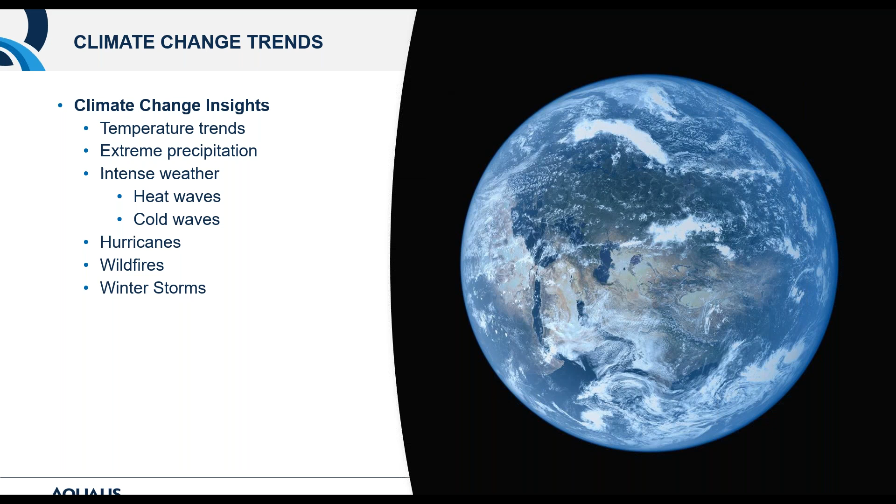As we discuss how climate change is affecting our environment and the influences each has over stormwater, we are also going to address how each solution is either a reactive measure or a proactive measure. Today's objective is not only to address aging stormwater infrastructure in relation to climate change, but what we can actively do to address these changes in the stormwater industry and create a plan moving forward.

Relative to today's presentation, the definitions of reactive and proactive are as follows. Reactive: activities that address any issue when it comes up, responding to the problem, and dealing with emergencies or failures on a case-by-case basis. Proactive: solutions aiding in the mitigation or elimination of problems before they occur, as well as anticipating an issue and intervening to prevent future recurrence.

According to the National Climate Assessment, the U.S. annual average temperature has increased by 1.3 degrees to 1.9 degrees since 1895. There were fluctuations throughout the 20th century, but warming trends remain consistent since the 1970s, with a rapid increase in temperature change. As mentioned previously, September of 2020 was the hottest month on record. The 9 months of January through September were 1.84 degrees Fahrenheit above the 20th century average, the National Centers for Environmental Information reported.

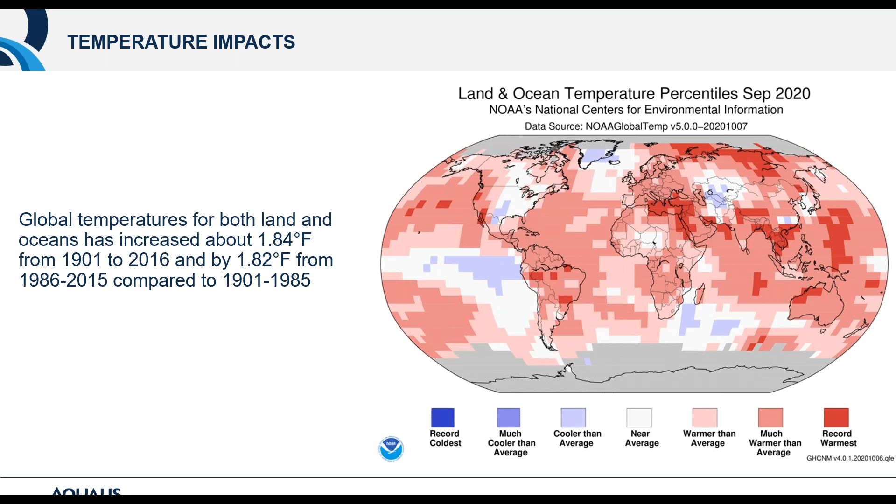As we've established, warming is occurring, but how does temperature impact stormwater runoff and local ecosystems? Thermal pollution is a threat to local ecologies, and stormwater runoff contributes greatly to this effect. Per definition, thermal pollution is the degradation of water quality due to unnatural changes in water temperature. Stormwater generally warms by mixing with receiving water bodies and increases the surface temperature of the water.

What contributes to thermal pollution in stormwater runoff? Surface systems exposed to direct sunlight increase already elevated runoff, and impervious pavement increases the temperature of runoff. According to the EPA, asphalt can run 20 degrees Celsius warmer than sod surfaces and runoff roughly 10 degrees warmer than runoff temperatures. The University of Minnesota conducted a study on thermal pollution from paved surfaces.

This study found that out of 261 rainfall events in the summer, the average water temperature did change from interacting with paved surfaces. They found that when interacting with the paved surfaces, the overall temperature increase was a minimum of 37.4 degrees Fahrenheit, with a maximum of 60.62 degrees Fahrenheit. The study also concluded a relationship between the increase of rainfall temperature to runoff temperature and ground surface temperature. This warmed runoff then makes its way into the natural environment, heating the water bodies it reaches and ultimately harming the environment and aquatic life.

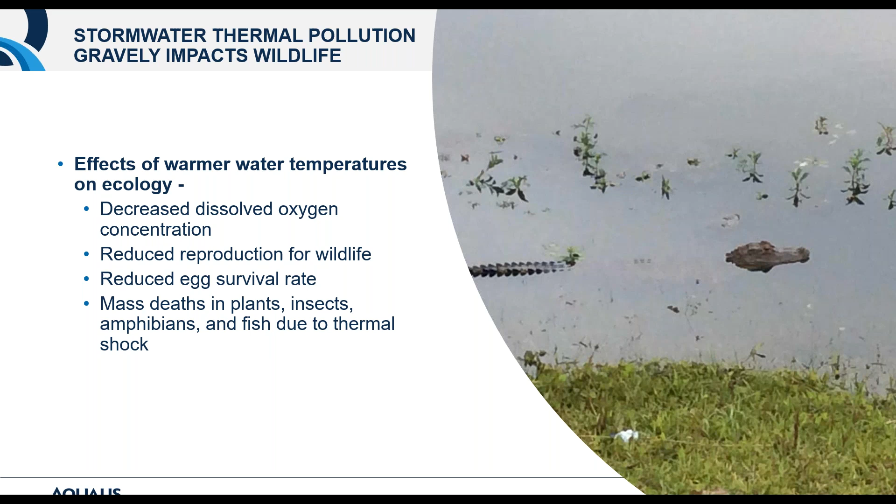How do we address thermal pollution in stormwater? We can take a completely reactive approach by introducing new wildlife to ponds after thermal pollution has created ecology issues in the pond, but this will only last until another warm rain event. Additionally, we can monitor the temperatures in our stormwater ponds, but what action can we take when we find out the temperature has increased? It's often too late at that point.

A reactive approach could be to increase capacity to dilute the increased temperature with the runoff with more of a temperature-controlled pooling of water.

Proactive approaches include utilizing technology and data from it to make predictions on thermal changes to make the appropriate retrofit or rehab changes. When it comes to retrofits, underground piping is found to have cooling effects on stormwater runoff, reducing risks to wildlife and local watershed, which is an option for ponds that are most at risk with runoff coming from impervious pavement. Designing new systems with increased pervious pavement would be beneficial, as found in a study published by MDPI's Hydrology, an international peer-reviewed open access journal in 2019.

A thermal spike was identified in all impervious pavement stormwater runoff datasets during their study of thermal characteristics of stormwater runoff. A temperature spike occurred within the first 5 minutes of exposure to rainfall. One surprising and beneficial finding of this study is the apparent higher capacity of pervious pavements to capture and exchange heat compared with impervious pavements. Another proactive approach includes increasing low-impact designs where appropriate to further treat runoff, collect pollutants, and reduce thermal pollution.

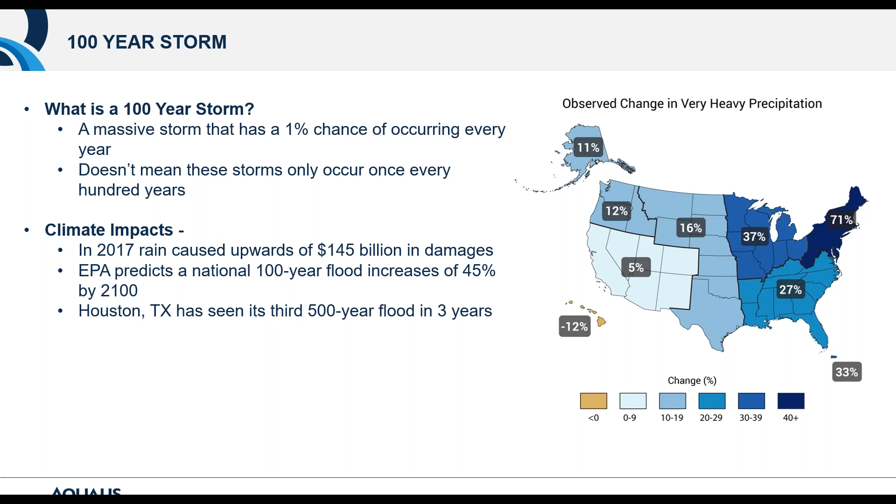In addition to causing catastrophic damage to local properties, the 100-year storm places intense stress on aging stormwater systems. Already aging infrastructure is reaching its capacity sooner than calculated, as currently designed stormwater control measures, or SCMs, cannot withstand 2.5 times their capacity, putting these systems in nearby areas at a greater risk for flooding. We see stormwater failures leading to emergency calls and repairs due to flooding after these recent storms.

Unpredictable rainfall, or not accounting for these changes in predictions for increased rainfall, causes systems to fail sooner. When the rainfall is extremely high, there is less time for systems to filter pollutants in the runoff that eventually end up in our local watersheds, and high runoff disrupts any settling process of sediment in the ponds.

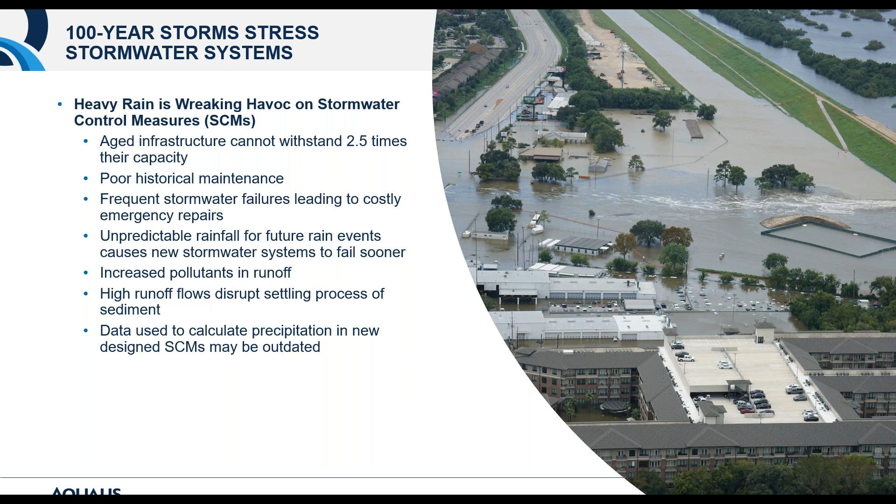Data for calculating precipitation is usually outdated and not accounting for the recent trends in high precipitation that we just discussed. When it comes to climate change, stormwater runoff is most impactful to systems. This is what SCMs were designed to do, to treat and manage runoff from rain events. However, systems are dated and aging. To continue to have systems function as designed, we must continue to innovate and adapt with new methods to treat

these extreme rain events. Reactive approaches to treatment in extreme rain events include expediting drawdown after a rain event. This is a typical practice in response to extreme rain. Monitoring runoff levels after a storm. This should always be done after a 1-inch rain event to ensure systems are still working as designed. Any repairs due to flooding. This is when a system will fail if not properly maintained. Most emergency repairs come in response to pooling water or overflows in parking lots, and all can easily be prevented with preventative maintenance.

Proactive approaches heavily rely on preventative maintenance, including dam slope inspections, a common failure from rain events, and an example we will discuss in the next case study. I can't say this enough. Proper preventative maintenance is key to proactive solutions to extreme rain events. By having preventative maintenance performed, common failures can be identified and solutions provided before a major repair is required.

Completing retrofit and rehabilitation to meet new precipitation calculations from new projected data. This is also where having data and history of a system through preventative maintenance can assist in making the right decisions for rehab and retrofits. Monitoring systems by utilizing technology, identifying if there are issues before a major storm so they can be handled before any flooding or major damage can occur.

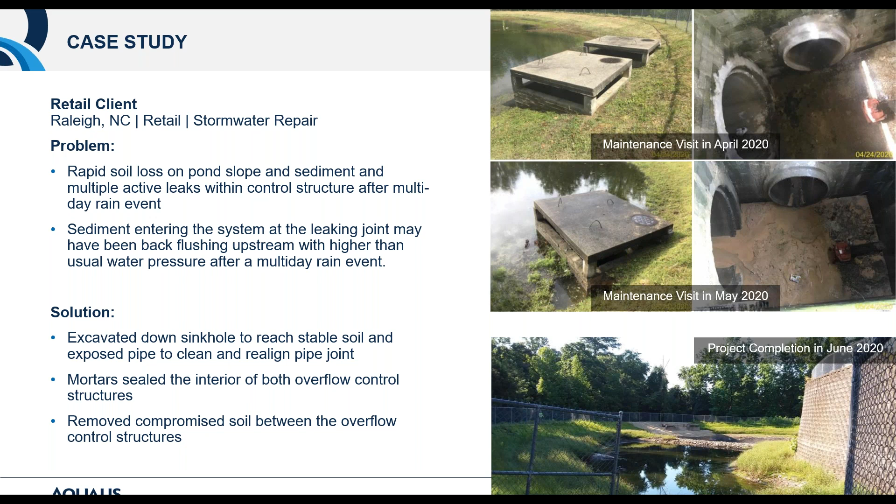The initial repair, using common practices, did not hold up to a major rain event, which we are seeing more frequently. To adequately rebuild the dam and address the issue, we engaged a geotech engineer who suggested a concrete cradle be installed along the length of the discharge pipe. Since this repair in August, the slope has held up very well with the cradle installation. We continue to monitor this asset during any significant rainstorms or light rain. This is a great example of how these extreme rain events are putting strain on systems and impact common retrofit practices today.

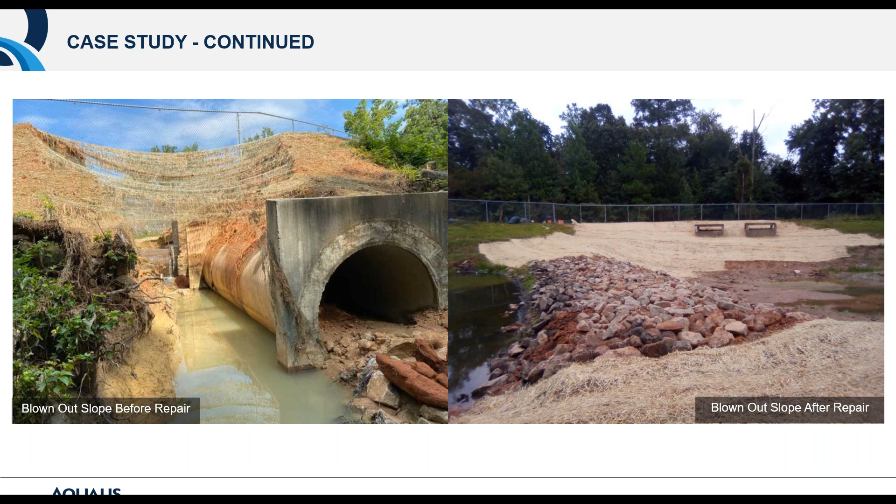It is not new news that 2020 has been one of the most active hurricane seasons in history. However, intensity of storms and frequency of hurricanes have increased since 1970. While projections indicate that there won't be more hurricanes like we saw this hurricane season, which has so far produced 29 named storms, we do anticipate seeing an increase in major hurricanes of categories 4 and 5.

Higher sea levels and warmer surface temperature, as we discussed previously, have all been known indicators to impact hurricane intensity. Additionally, we have seen a 6 to 8 inch higher sea level since 1900, which increases the height of storm surge for coastal regions, as we've seen in the last 20 years, like from hurricanes Katrina and Michael. Storm surge is more deadly and costly than rain from a hurricane. Coastal regions should be putting more emphasis on emerging stormwater solutions, as they are at greater risk for major failures and catastrophes to systems due to storm surge.

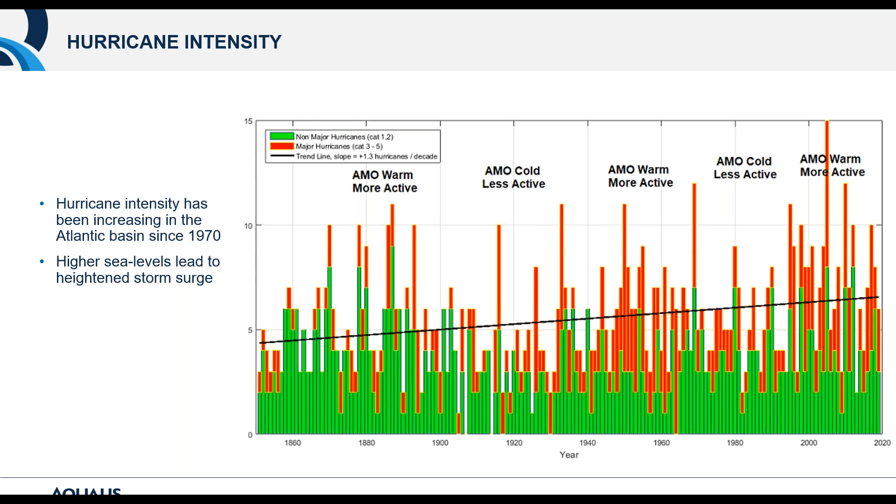When we talk about stormwater, our first thought is often rain and water runoff. However, it's not just the rain and runoff that impacts stormwater infrastructure. Storm surge and high winds are both major concerns when a tropical storm or hurricane makes landfall, and as we discussed in the last slide, storm surge impacts are increasing due to climate change. With storm surge comes quicker flooding. Unfortunately, there is no way of monitoring a stormwater system during a storm outside of technology, which we will discuss later in this presentation.

Powerful winds can lead to power outages that halt operations at portions of your stormwater system that require electricity to function, as well as blow debris into or onto stormwater infrastructure, causing clogs or blockages to the system. Costly emergency repairs, including dam failures, result in major property damage, sediment loading, and erosion throughout systems or damage to recently completed capital projects. Additionally, many below-ground assets are at risk structurally due to age, as the average wastewater and stormwater infrastructure in the U.S. is more than 100 years old.

Public water supply is at high risk for contamination, as hurricanes can cause cracked water lines from trees that have been uprooted. In 2012, following Hurricane Sandy, the Northeast saw significant damage to more than 100 facilities that supply drinking water to residents and sewage treatment plants. Hurricane Sandy resulted in $2.6 billion to repair, rehab, and increase the sustainability of these systems.

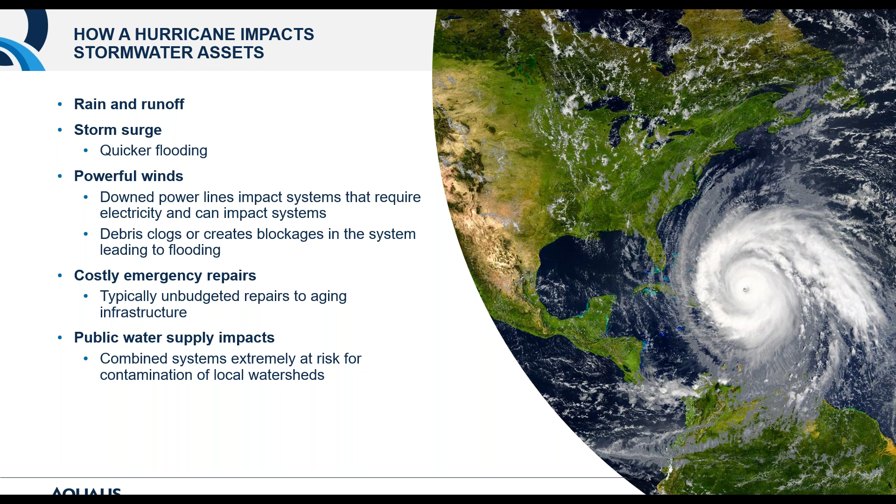Similar to what we've discussed in the extreme rain events, but some different here, proactive approaches include drawing the pond down prior to the storm. Routine inspections are still critical in removing debris around your assets to prevent any blockage, and testing of systems to ensure they are functioning properly. Continue to evaluate if flooding is occurring on a frequent basis that retrofit or rehabilitation is needed for additional capacity, especially in areas most prone to hurricane activity.

Utilizing technology to monitor before a storm to assess overall health of the system. This data is essential for determining the priority of retrofit or rehab for systems. Assessing and testing backup energy that extends more than one day. It is essential to prepare systems and have a plan before hurricane season. This means planning as early as January, setting up preventative maintenance plans, and strategically planning repairs before hurricane season, which I will walk through in a checklist later in this presentation so that you are fully prepared for an extreme rain event.

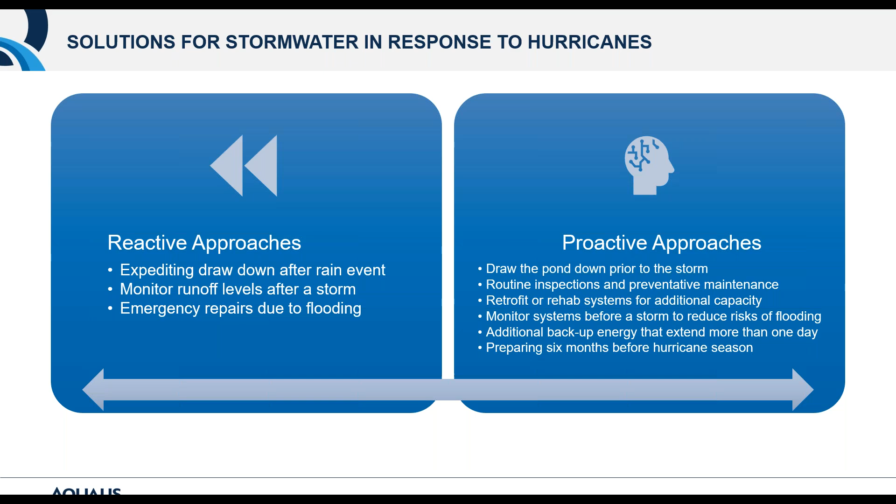As of August this year, South Carolina had an increased chance of hurricane landfall from 18% on an average year to 27%. It is safe to say that South Carolina must respond to rising sea levels, threats of hurricane, and extreme rain events. As part of that initiative, Charleston, South Carolina is making proactive improvements across the city to increase sustainability and mitigate future flooding. As part of their 5-year capital improvement plan, they are addressing stormwater drainage projects as a short and long-term capital need for the city.

One great example is the Forest Acres project that was completed for Phase 1 in 2018, even being awarded the South Carolina American Public Works Project of the Year. According to the City of Charleston, South Carolina, the existing pump station consisted of a wet well with a single vertical pump, originally from 1968, discharging through a single 48-inch concrete pipe. The stormwater pump station is powered by electricity from overhead power lines and has no emergency backup generator.

The station pumped stormwater approximately 1 mile east through a gravity flow pipeline located in the West Ashley Bikeway to where it discharged into the Ashley River. This proved to cause significant flooding during extreme rain events from tropical storms and hurricanes, as a lack of backup generator would cause flooding to occur quickly and typically knee-deep in height.

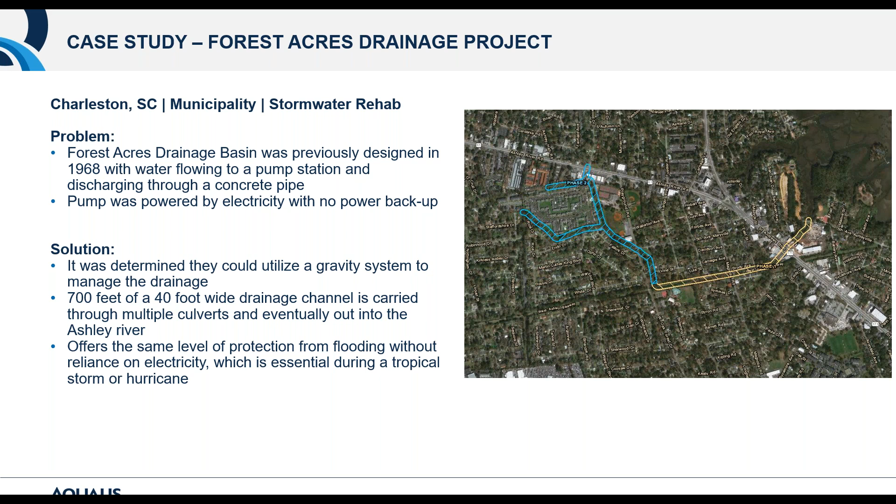As extreme weather is on the rise, including higher temperatures and climates that are drier in nature, wildfire is on the increase as of the last 2 decades, with double the number of acres burned since 2000 in comparison to the 1990s. There are 3 factors in which fire needs to thrive. First, the right weather and climate conditions. Warmer weather and drier seasons where rainy season does not usually begin until October. Like a hurricane season, fire season runs from June to September, typically when drought conditions can be expected.

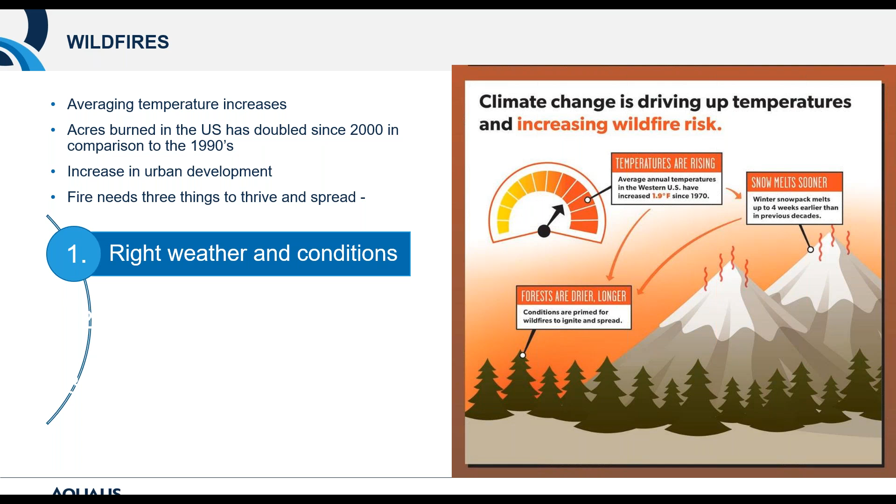Burnable fuel. With warmer atmosphere, water is being absorbed at a rapid rate, including plants, soil, lakes, and rivers all being absorbed, leading to an increase in flammable materials. Spark. Only 10 to 15% of wildfires occur naturally. Human activity, like unattended campfires, cigarettes, or gender reveal parties, as we saw this year, all can be the spark in the right conditions to burn acres of land, destroying property, homes, and local environments.

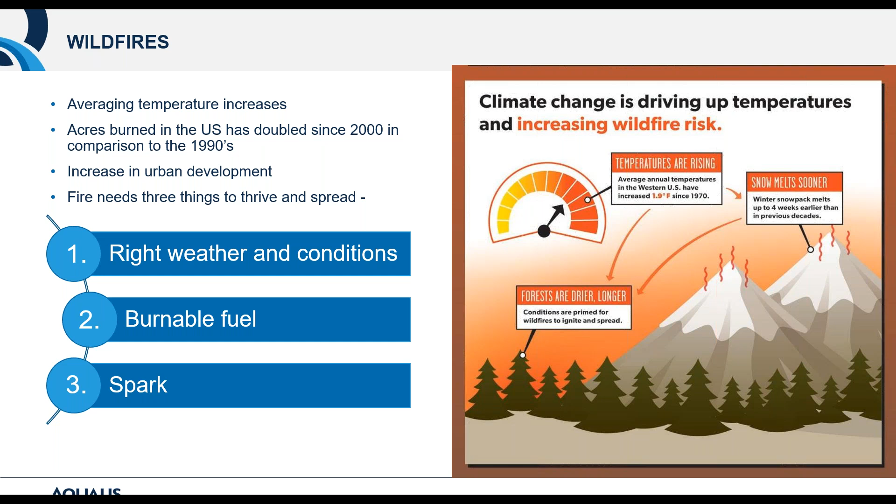Increase in urban development has also reduced the natural cooling effects from trees. In fact, just trees shading a neighborhood can make it 6 to 10 degrees Fahrenheit cooler than neighborhoods without tree vegetation. Also a great solution for thermal pollution. This is an excellent example from FEMA around the risk of flooding after a fire, especially for those at the bottom of a slope. Floods pick up the charred debris from the wildfire and deposit it directly into stormwater assets, clogging systems and requiring costly repairs.

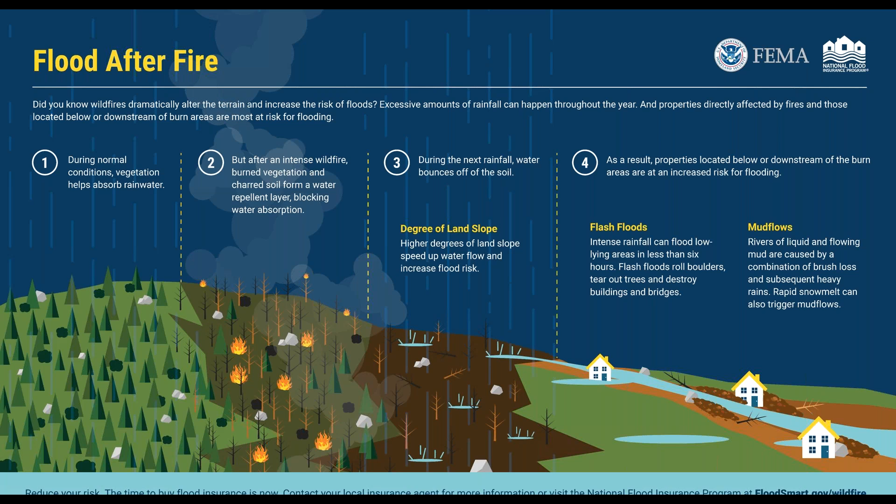In stormwater, it seems like water is what matters. However, there are so many contributing factors to impacts on water quality, sediment buildup, and flooding that can result from wildfires. Hydrophobic conditions is the inability to absorb water due to intense heat. Essentially, the grounds after the fire will repel water, causing increased chances of flooding. Ash deposition and accumulation can clog systems. However, if systems are maintained per O&M agreements, they should effectively trap the ash in the muddy bottoms of the settling ponds.

Heavy metal contaminants can make their way into runoff after a first rain after a fire. Systems may not pass an inspection due to the ash accumulation and water quality. It is essential that within a window of 7 to 10 days after a fire, a water quality test is completed. Filters that remove pollutants will need to be replaced sooner after a fire, and it's important to monitor that these filters continue to function as designed and are replaced as needed, or additional capacity added if in a fire-prone area.

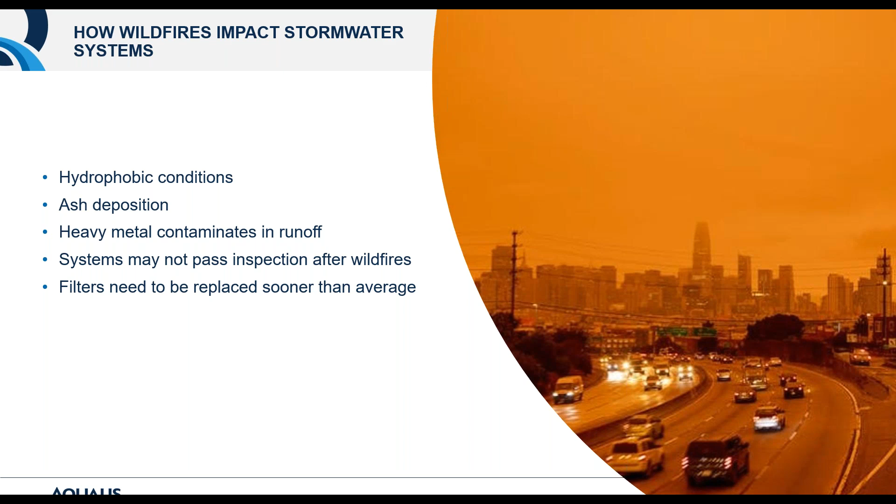Reactive solutions for stormwater in response to wildfires include pH balance testing after wildfires and proper treatment if at high levels. Monitoring runoff after a storm due to the hydrophobic conditions; a rain event that may not be extreme in another region could pose to be an extreme amount when precipitation can't be absorbed by the soil. Removal of any ash accumulation, if excessive and not settling in the pond. Important that this is monitored, and if systems are not being maintained properly before an event, ash accumulation could pose a major threat to the system. Replace any filters after a wildfire to ensure these are continuing to function as designed to filter pollutants.

Proactive approaches in relation to wildfires include routine inspections and preventative maintenance, retrofit and rehab for additional capacity, monitoring systems before a rainstorm and shortly after a fire to reduce risks of flooding, and prioritizing wetlands and dams that have been shown to be a great treatment for preventing wildfires.

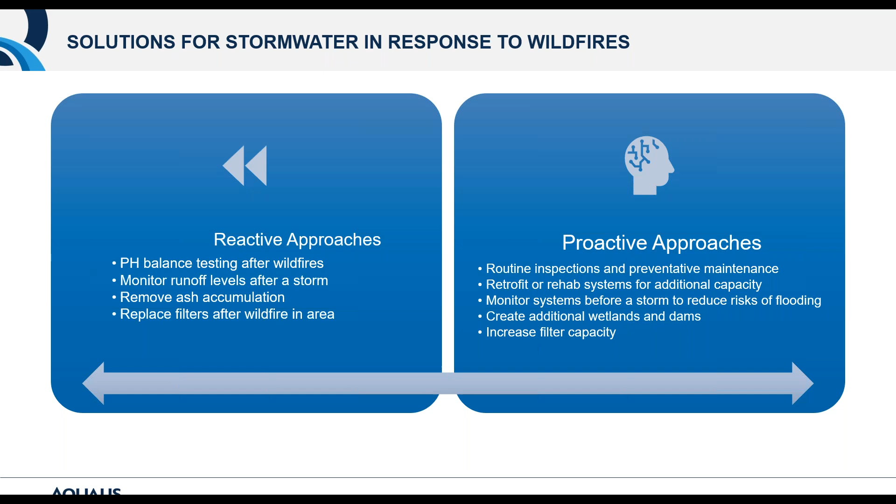After recent wildfires in Albany, Oregon, our crews tended to our sites that have contracted maintenance programs. As recommended following a fire in the area, monitoring and visiting sites within 7 to 10 days to assess potential wildfire effects to stormwater assets is imperative. As pictured here, you can see ash accumulation on the pond surface. pH testing to monitor any levels that would require treatment is necessary.

The solutions to these issues are as follows. How to treat pH: you can aerate and add a fountain to stimulate the release of carbon dioxide, which will break up and form carbonic acid, which will help lower the pH. As mentioned before, the nature of the system often mitigates the issues that ash can create. These settling ponds can effectively trap the ash in the muddy bottom.

The desirable emergent plants, like common rush grass, will absorb pollutants like heavy metals. For major accumulation events, we can bring in temporary treatment units that constantly cycle the water out and back in, like a massive dialysis system.

We can neutralize the pH and absorb pollutants and metals from the water by using oyster shells at strategic locations. Ash treatment is one of the many stormwater applications using oyster shells shoveled directly into stormwater catch basins to absorb heavy metals, with the goal of increasing water hardness and decreasing metals.

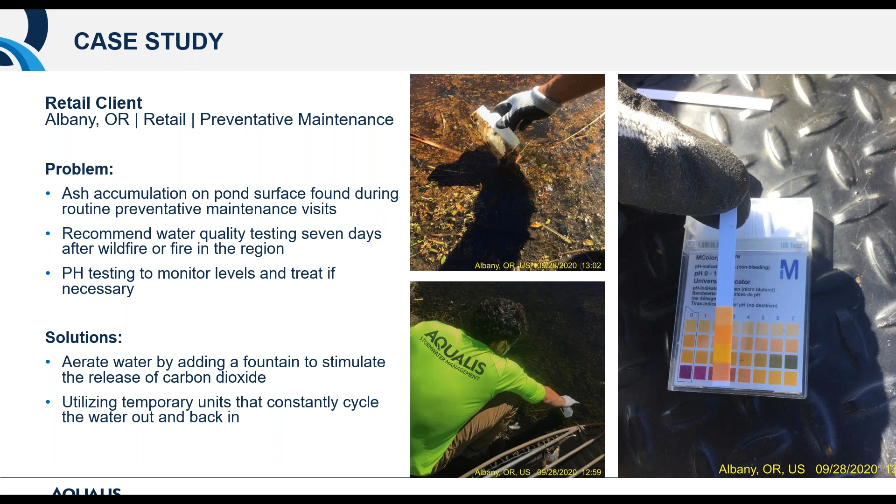Climate trends indicate an increase in intensity of snowstorms when they do occur. However, there has been a decrease in intensity in snowstorms in the last 20 years due to rising temperatures. Since 1972, snow coverage season has decreased by 2 weeks, causing earlier than normal snowmelt, putting further stress on stormwater assets.

2020 winter predictions, according to the National Weather Service, predict warmer and drier conditions in the south and wetter and cooler in the north, specifically in the Pacific Northwest, Northern Plains, Great Lakes, and into the Ohio Valley.

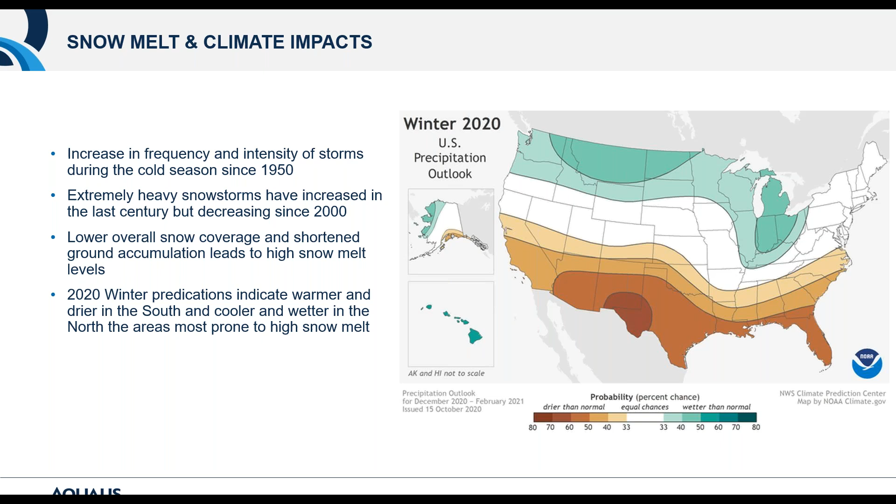Snowmelt presents some unique challenges to stormwater systems. Since freezing temperatures cause the surface of the ground to be frozen, snowmelt can't infiltrate the ground. Even minor amounts of snow can increase the chance of flooding in the right conditions. When this snow does eventually melt, it picks up debris just as an extreme rainstorm would, all with the potential to cause blockage in the systems and inevitably lead to flooding.

Also, as the snowmelt occurs, it is picking up pollutants on the road from de-icing salts and other chemicals. Snow carries more pollutants, especially airborne pollutants, as the snow is exposed for longer before it melts. The most at risk for heavy pollution and impacts is the last snowmelt of the season. Mixed with a small rain event, this can lead to high concentration of pollutants and a high runoff volume, putting extreme stress on your stormwater system.

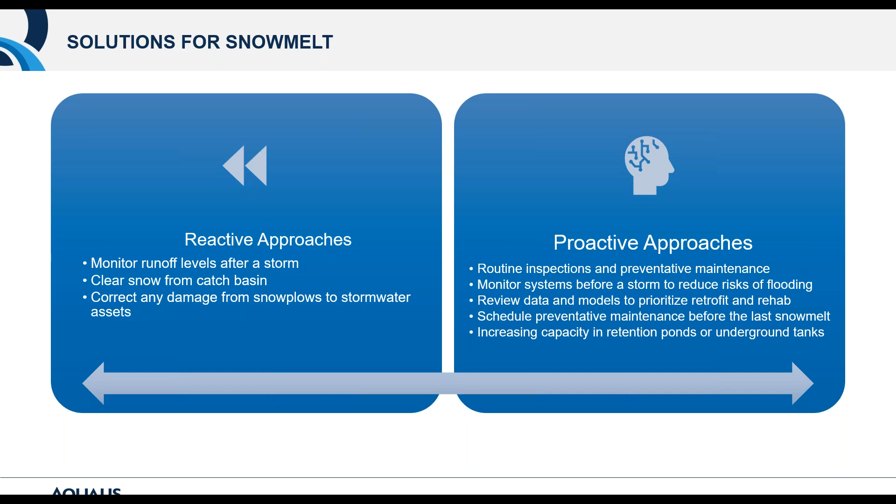We also see fluid leaks from heavy equipment that is typically stored year-round in the parking lots that eventually reaches catch basins, impacting water quality. There are a few solutions to these issues we see at the sites and how we treat them.

Street sweeping is commonly done almost daily at sites with this amount of buildup still occurring daily. Maintenance and monitoring is typically done on site to prevent any blockages that can cause catch basins to not function as designed. Additionally, utilizing industrial vacuum trucks to remove the excess sediment is something that we use as a treatment option to reduce and remove buildup.

As a maintenance provider and protector of local watersheds, we look for any potential contaminants in stormwater systems when on site. We see this far too often with heavy equipment, including snowplows that are stored year-round in parking lots or local properties. We monitor these situations should treatment be necessary, but there are proactive items that can be done, like adding absorbents underneath these vehicles to capture the fluids before they reach the pavement and ultimately reach the catch basin.

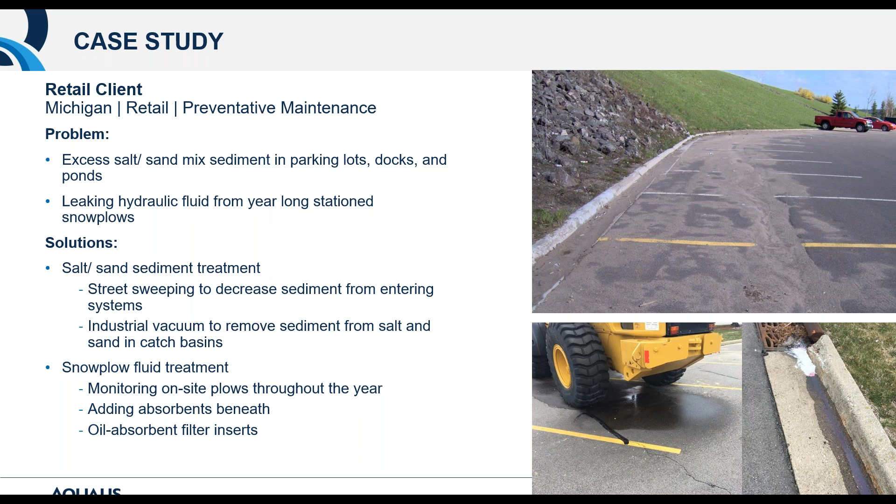Preventative maintenance and checklists for preparing systems for extreme weather. Before we talk about the importance of preventative maintenance, Ryan is going to interrupt to poll attendees to see how stormwater is managed in your region.

Awesome. Well, thank you there, Erin. Folks, as Erin just said, we're going to pause for a quick moment to poll everyone real fast. This is our one and only poll question of today's presentation. So the question here is, how do you see stormwater being managed in your region? Choices are A, stormwater management provider, B, landscaper provider, C, handled internally, or D, do not have a preventative maintenance plan.

I'm going to go ahead and launch what we call the quick poll widget in just a quick second, and you'll be able to input directly into that. I'm having just a little bit of trouble getting this thing started, so if you folks will just bear with me. My apologies, Erin. It opened it and then it slammed it shut right away, so I'm having to recreate it real fast. In the meantime, I'll reread the options: A, stormwater management provider, B, landscaper provider, C, handled internally, or D, do not have a preventative maintenance plan. We're just a moment away, I do promise. Folks, if you'll hold off on putting them in the chat box, we're actually going to launch a widget for these.

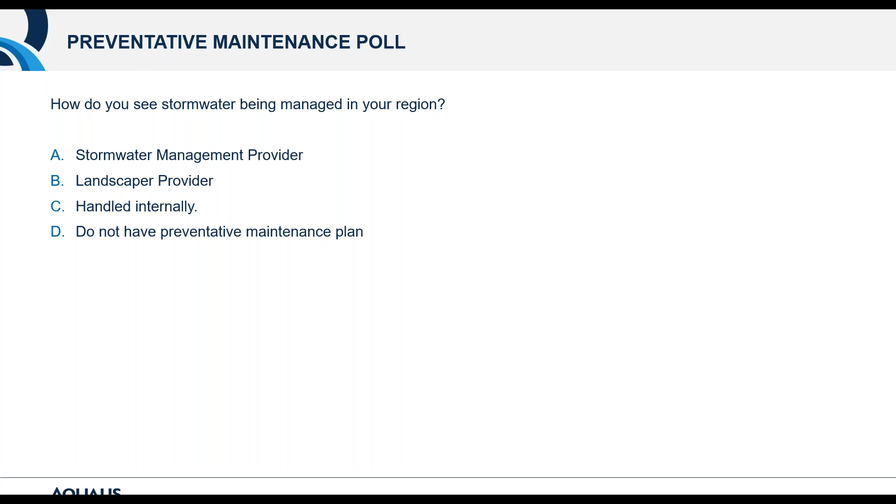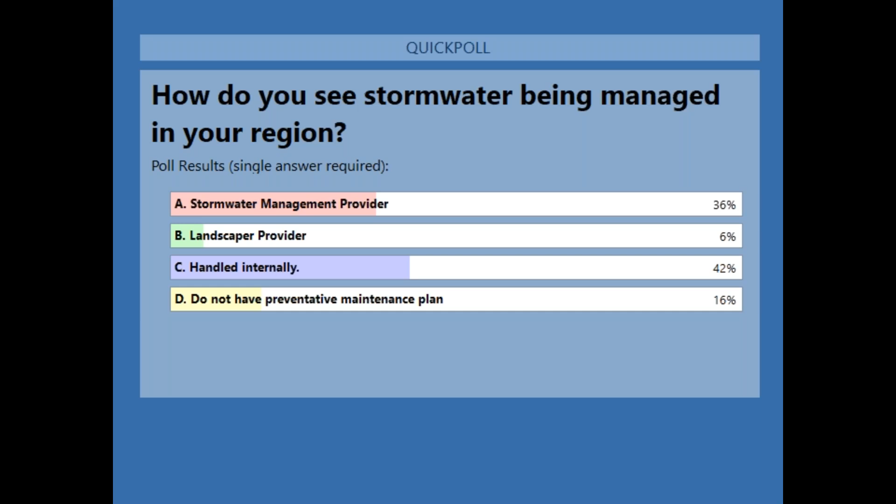Awesome, thank you, Erin. All right, folks, we've been open for about a minute and we have 80% voted, so let's consider that good enough. Let's close this out and share those responses. C, handled internally, ends up winning at 42%, followed by A, stormwater management provider at 36%. 16% say D, do not have a preventative maintenance plan, and just 6% said B, landscaper provider. Thank you all for your participation.

Thank you, Ryan. And I do apologize. We just had a major storm move in here, so it might get a little bit noisy in the background.

Jumping into preventative maintenance, the goals of stormwater management include protecting our environment, reducing flooding to protect people and property, reducing demand on public stormwater drainage systems, supporting healthy streams and rivers, and creating healthier, more sustainable communities. We tend to find many landscapers performing maintenance on stormwater systems, but just addressing vegetation is not enough to keep SCMs in compliance and performing at design capacity to properly manage increased runoff due to climate change.

We know that for every $1 spent on stormwater maintenance, we expect $4 in cost savings and loss avoidance, if not more, financially and environmentally. Preventative maintenance is the solution for keeping systems functioning in order to meet the new demands for climate change. Regular maintenance of stormwater infrastructure reduces the risk of system failures and the frequency of costly restorative repairs, and as I presented earlier, is always the proactive solution to treatment of all extreme weather.

Our crews perform with 3 to 4 individuals stationed in geographies across the United States. Our team members, including our administrative team, are all certified for stormwater inspections and maintenance. We establish a frequency of visits throughout the year based on the specifics to the locations and the potential needs or threats to the systems, as well as the O&M agreements established with municipalities.

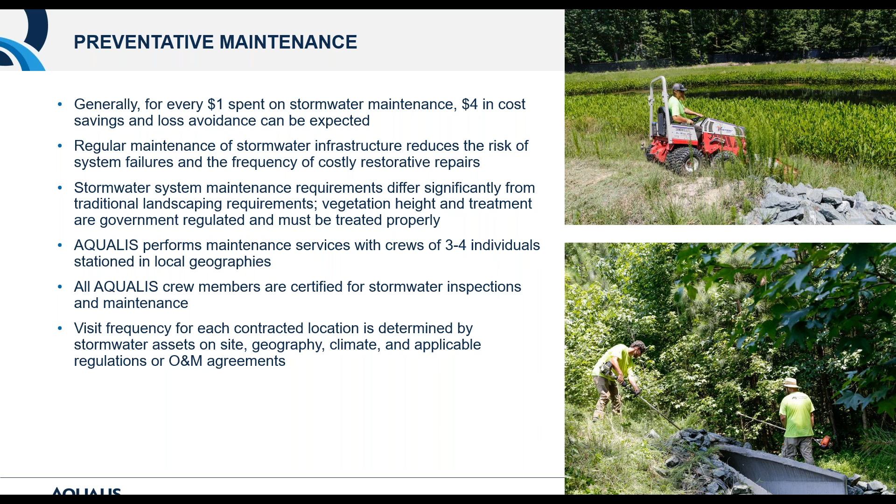For more than 20 years, this has provided us a firsthand view of how these climate trends are impacting stormwater. Whether you are in Florida experiencing threats of extreme rain in the summer, or in Washington experiencing snowmelt in the spring, we address each key geography based on their specific needs.

The solution that has been consistent throughout this webinar is the importance of preventative maintenance. What we know is that these systems were designed to hold large capacities and be prepared for a 100-year storm or flooding. This should be the time for your stormwater asset to showcase what it is meant to do. That being said, it is only as good as it is maintained.

The future of stormwater. As we've established, we need data to drive our next steps in stormwater. With information within reach always, it's time to adjust how we approach aging infrastructure and capture a full picture of how stormwater is managed in systems with the use of technology. We can use data from sensor technology to understand how best to rehab or retrofit to meet new capacity needs, and we can enhance further stormwater design to meet new capacity requirements.

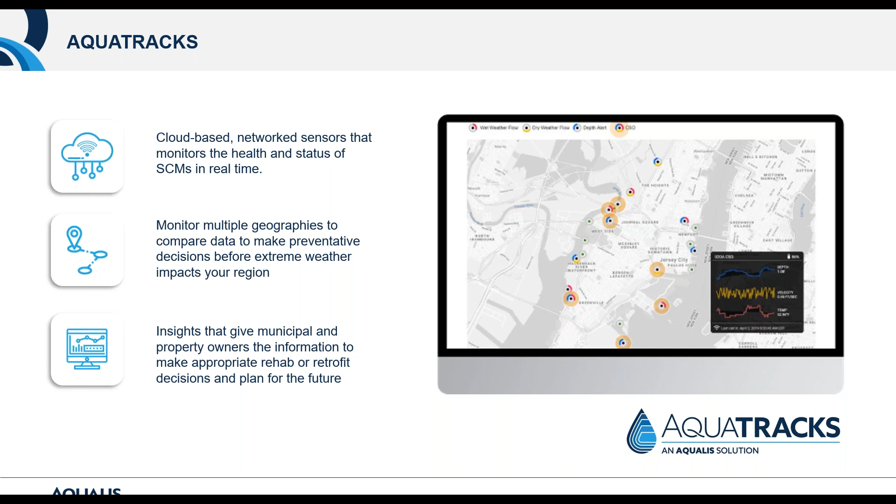The system allows for monitoring across multiple geographies to compare data to make preventative decisions before extreme weather impacts the region. The system includes weather forecasts and alerts to prevent any major catastrophe to the system before it occurs. Insights provided by the sensor system give municipal and property owners the information to make appropriate rehab or retrofit decisions and planning for the future.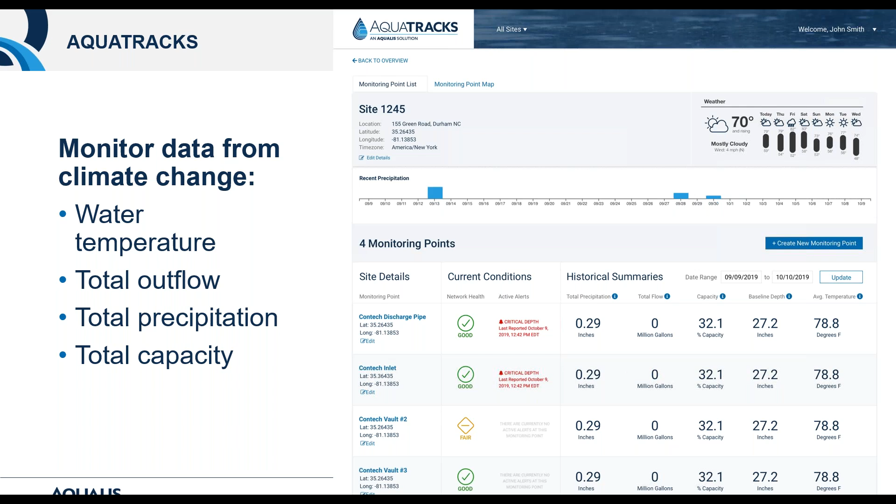This system gives you a holistic view to make decisions on how to prioritize repairs, alert maintenance crews on potential needs for monitoring, and overall provides data that can assist in making decisions for other properties or projects. The technology surrounding these sensors will continue to improve and advance to further meet the needs of municipalities and property owners in the future.

In addition to technology, the future of stormwater is not only addressing aging infrastructure, but also considering climate trends that put further stress on stormwater systems. With urban populations expected to grow to nearly 70% by 2050 and more frequent and intense storms occurring across the country, there is ever-increasing pressure on stormwater systems and water infrastructure. Taking these into consideration is essential as we repair, rehab, or retrofit systems across the United States.

We know that existing SCMs often fall short of meeting water quantity and water quality needs. How can we address these for future stormwater assets? For water quantity, we can increase capacity for newly designed and rehab current assets to manage these intense rain events above and below ground. We can expand the use of permeable pavement, increase holding capacity in ponds, utilizing underground vaults with additional capacity. We need to treat additional pollutants with the install of more filters and replacement on a more frequent basis. We can utilize technology, as we just discussed, to make informed decisions to properly rehab systems.

For water quality, we can address these needs by introducing further green infrastructure through bioretention ponds, green roof expansion, and rain gardens, as well as extend the holding time for runoff. As we look at the future of stormwater, we know that rehabbing existing gray infrastructure is essential, as well as continuing to introduce more green infrastructure. As we presented earlier, additional green infrastructure has shown to treat and manage many issues that climate change is presenting.

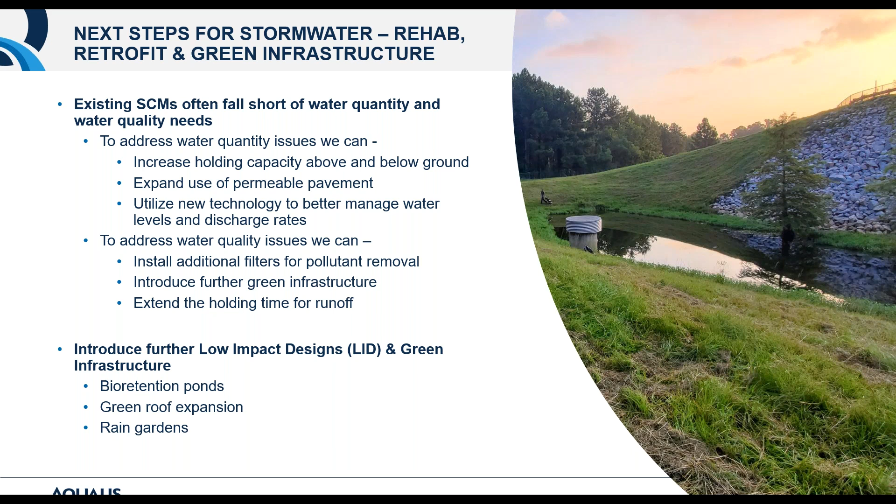As we talk about the future of stormwater and the changes that need to be made to combat climate change, I wanted to share a recent green roof study that our environmental interns conducted this past summer. This client, located in Chicago, required a cost-effective way to manage stormwater runoff. As we established, in most urban areas stormwater runoff is a major concern due to the lack of pervious surfaces that naturally absorb and filter stormwater and the impacts of thermal pollution from the heat island effect.

With much of urban areas being dominated by non-natural features, habitat for many insect populations is dwindling, along with climate impacts, as we established, causing declines of bees and pollinators globally. Specifically, with the changes in seasons, with snowmelt occurring earlier in the season or air temperature increasing, pollinators can become out of sync and ultimately miss peak pollination windows. As part of AQUALIS's Root for Nature program, we established pollinator gardens to assist in providing habitats that increase population of pollinator species. Through this retrofit project, AQUALIS provided research opportunities for college student interns.

In 2020, interns planted a pollinator garden on the green roof and monitored subsequent use of this area by insects to determine if this green infrastructure asset would support natural biodiversity. The interns found that the insects did use the garden more frequently than an area of traditional green roof vegetation and an area of the non-vegetated bare roof. This finding suggests that green roofs can not only solve stormwater management issues, but can also support an increase of biodiversity within urbanized areas.